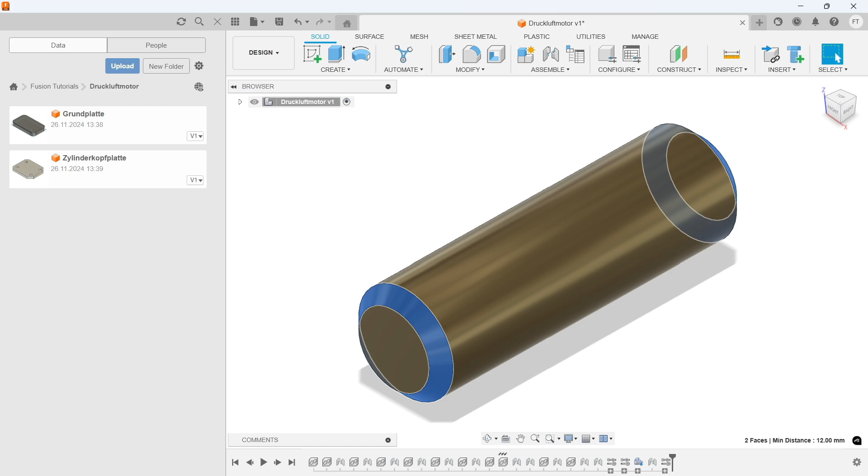The pin is a simple cylinder with a chamfer at both ends. It is important to mention that this pin is actually a standard part and would be available in component libraries. Nevertheless, we are creating it manually to learn the different methods in Fusion.

At the beginning, we create a new design as usual. This time, we use the plus symbol in the top right to skip the step of going through the File button. It is advisable again to save the component right at the beginning and assign a meaningful name. Saving can be done either as usual using the Save button or with the shortcut Ctrl and S.

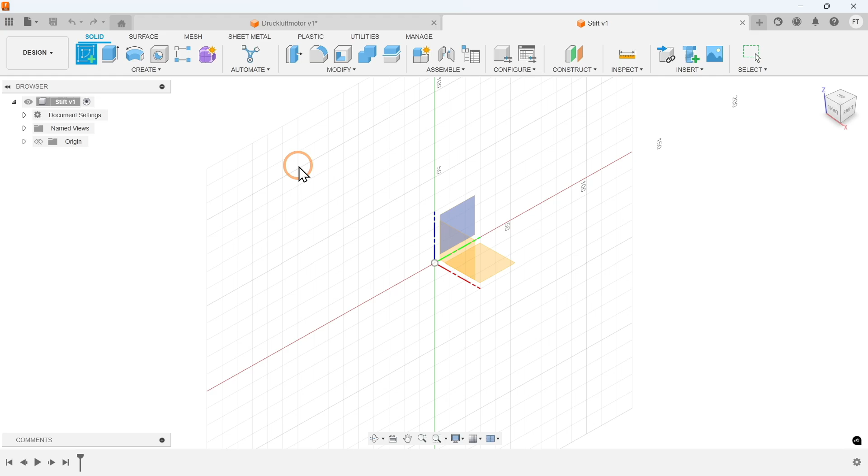If the preset folder is not correct, the desired storage location can be selected from the drop-down menu. Now the file for the pin has been added to our folder. Again, we start our design with the sketch in the ZX plane. Instead of a rectangle, we will draw a circle around the origin this time.

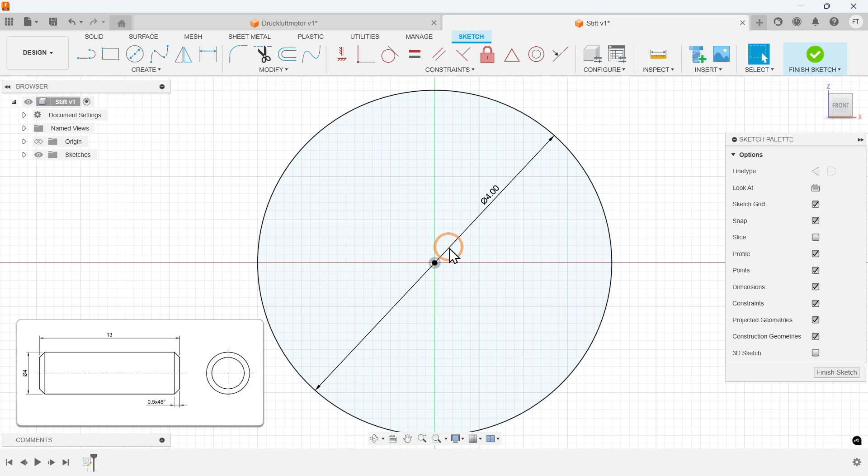To do this, go to the menu to Create, Circle, Center Diameter Circle. We give the circle a diameter of 4 millimeters and confirm the entry with Enter. We can now finish the sketch and simultaneously start the extrusion by using the shortcut E. The pin should be 13 millimeters long. We enter this value and confirm it with Enter.

Now all that's missing are the chamfers. Since we will be using the chamfer tool more frequently for further construction, we can add it directly to our toolbar. To do this, open the Modify menu and click on the three dots next to the chamfer tool. By checking the box Pin to Toolbar, the tool will be permanently shown in the top bar. Now we select the two edges of the cylinder and set a chamfer of 0.5 millimeters. With that, the component is already finished.

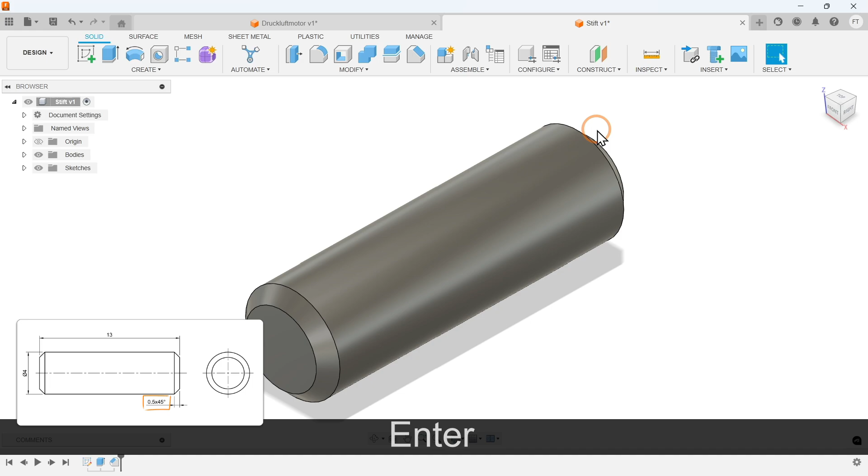However, there is an alternative method for rotationally symmetric components like this pin: rotating a profile around an axis. First, we hide the pin we just created in the browser in the Bodies folder and start with the second method. This time, we start with a sketch on the YZ plane. With this method, we draw the cross-section of the pin and rotate it around the central axis.

First, we draw a rectangle by choosing the two-point rectangle function. The first point is placed on the origin and the second can be placed anywhere on the sketching plane. With that, we've created an undimensioned rectangle. Since we want to create a rotationally symmetrical component from it, we select the bottom line of the rectangle and change it to a center line in the sketch palette.

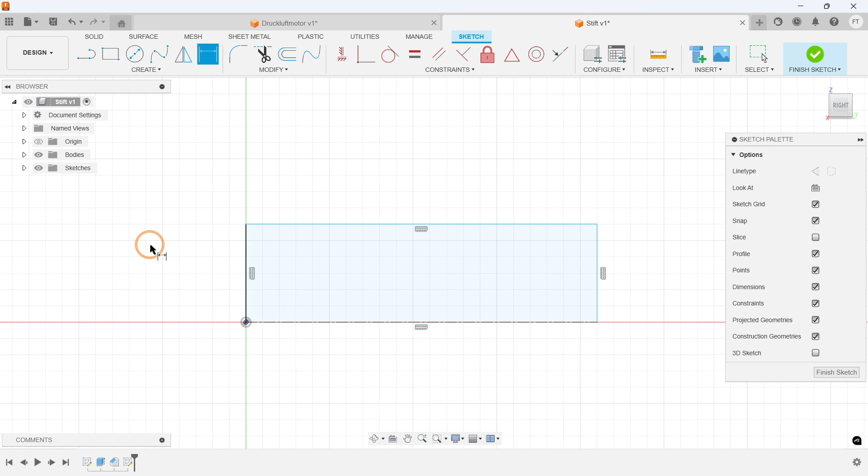Now, in the Create menu, we select the option Sketch Dimension. With this tool, we can add the missing dimensions. First, we dimension the diameter. We click on the center line and the parallel, and specify 4 millimeters as the diameter. The Dimension tool remains selected and we measure the length of the pin as 13 millimeters.

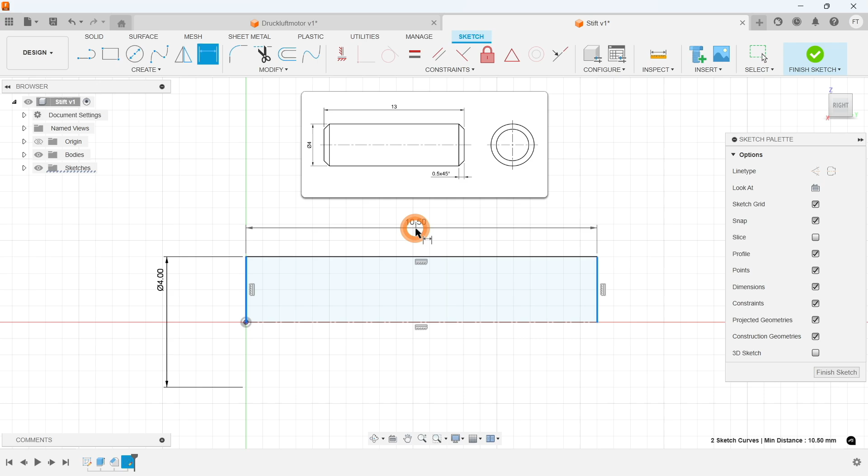This can be done in two ways. Either we directly measure the line that should be 13 millimeters long, or we measure the length by selecting the two outer edges and defining the distance between them. Change-friendly dimensioning means that dimensions are set in such a way that they do not shift when later changes are made to the model. For example, if we later add a shoulder to the shaft, the total length of the pin remains constant because it is defined by the distance between the edges.

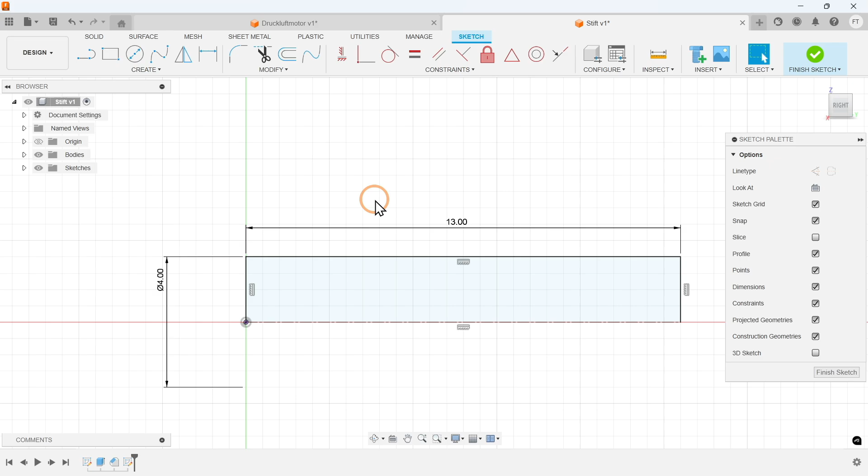New geometries can be placed within the existing dimension without changing the total length. This approach makes the model more flexible and allows for quick, efficient adjustments without having to redimension each individual line. It also reduces the likelihood of errors during design changes. We can now complete the sketch. To create a solid body from our rotational contour, we use the Revolve command.

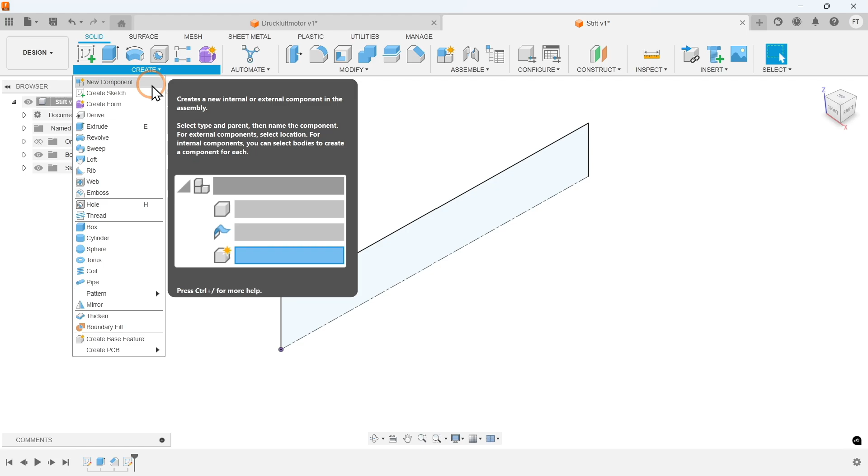To find this command more quickly for future rotationally symmetric parts, we create our own shortcut. To do this, we go to the Create menu and click on the three dots next to the Revolve command. Here we select the option Change Shortcut. In the next step, we simply press the key that should serve as the new shortcut for the command, in this case, the W, and confirm the entry. From now on, we can start the Revolve command at any time by pressing the W key.

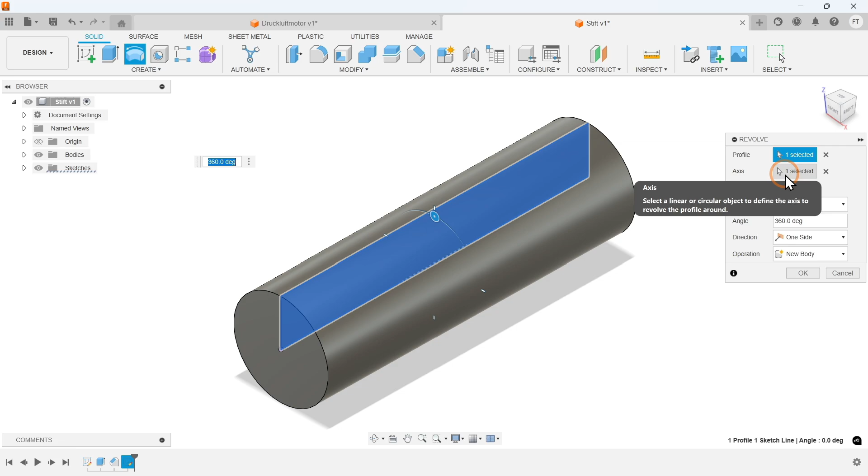We select the rotation profile and the center line as the axis. The cylinder is now created by rotating. We have just created the same cylinder as before, but in a fundamentally different way. We could add the missing chamfers of 0.5 millimeters again in the same way. We hide the sketch again and now try a third method that is suitable for simple bodies like this.

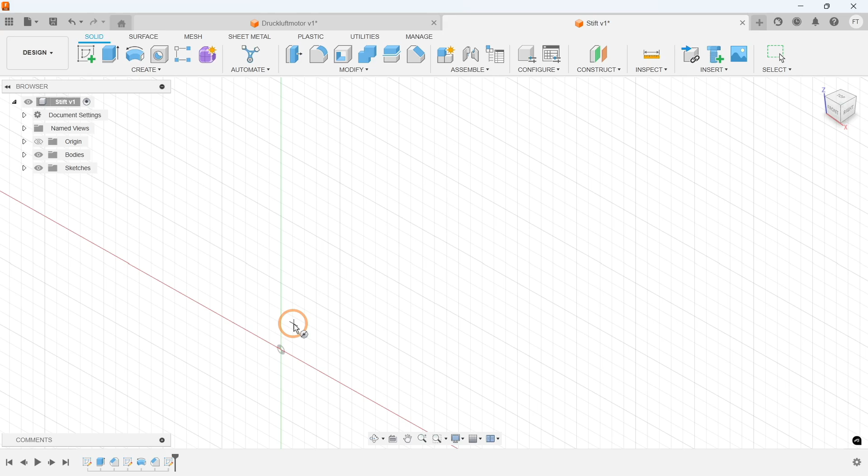The cylinder tool. For this, we can directly select the cylinder command in the Create menu or simply search for the command. Press the shortcut S and enter cylinder in the search field. This way you can quickly find the command and use it directly. Afterwards, we select the XZ plane and set the origin as the center. Now we enter the diameter of 4 millimeters and the height of 13 millimeters. The cylinder is created directly. Here we can also add the chamfers as usual.

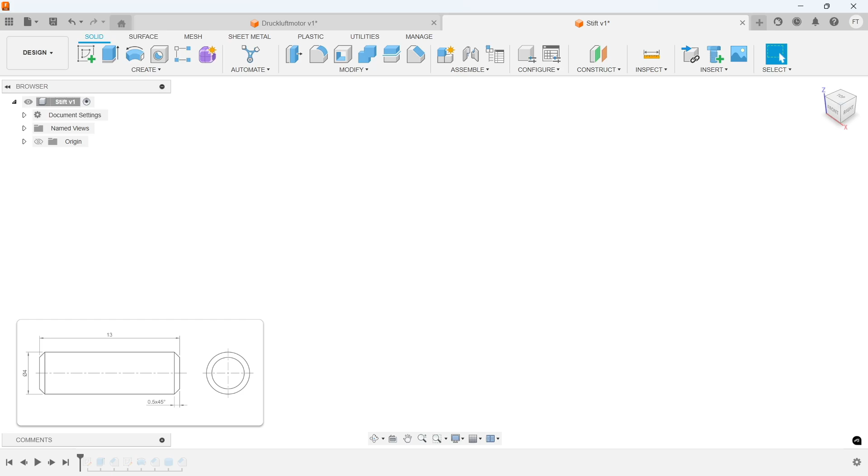Finally, we compare the three methods with each other. The extrusion of the circle is a quick and straightforward way to create rotationally symmetrical components like our pin. Rotation is particularly suitable for more complex rotational bodies with varying profiles, allowing for very versatile shapes. You'll learn more about this in the next video. The cylinder tool is especially efficient for simple geometries because cylinders can be created without a prior sketch with just a few clicks.

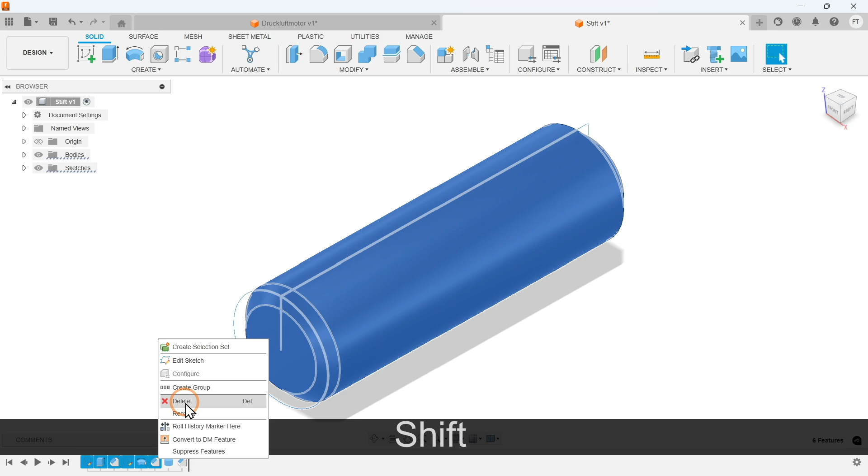Since we now have three identical pins, we should delete two of them. To do this, we can remove two of the pins in the browser under Bodies, or delete the corresponding steps in the construction history. To finish, we change the material of the component to bronze. For this, we go to the toolbar, select material, and choose bronze from the material library. The material properties such as mass and density are now automatically adjusted. We save our component again, either using the Save button or with the shortcut Ctrl and S.

In this video, we learned about three different methods to create a rotationally symmetric body. In the next video, we will take a closer look at the revolve function to create a more complex rotationally symmetric component.